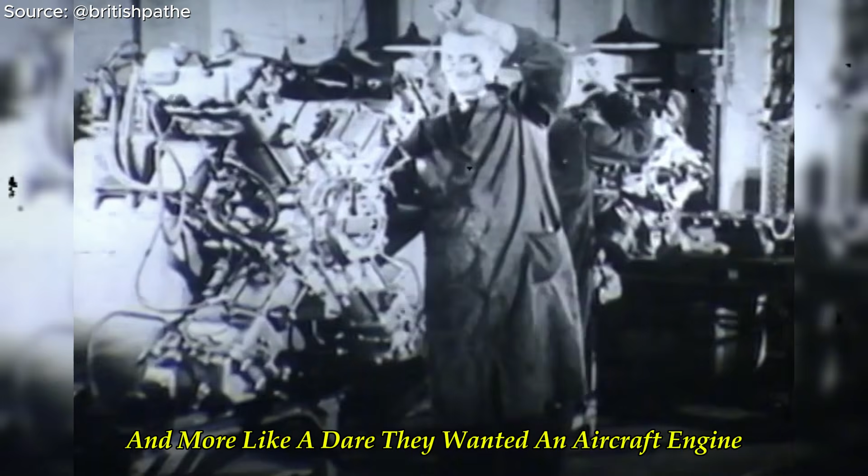In 1941, the United States Army Air Forces sat down and wrote a specification so extreme that it read less like an engineering request and more like a dare. They wanted an aircraft engine capable of producing between 4,000 and 5,000 horsepower. For context, the engine powering the workhorse Boeing B-17 Flying Fortress, the Wright R-1820 Cyclone, made about 1,200 horsepower on a good day. The Army wasn't asking for an improvement. It was asking for something more than triple the output of engines already considered massive.

And the reason wasn't ego. It was geography. Planners were terrified of a scenario in which the United Kingdom fell to Nazi Germany, leaving America without a forward base from which to strike Europe. If that happened, bombers would need to fly from North American soil, cross an ocean, deliver their payload, and return, all without refueling. That kind of range demanded a new class of engine, one built around fuel efficiency at a scale nobody had ever attempted.

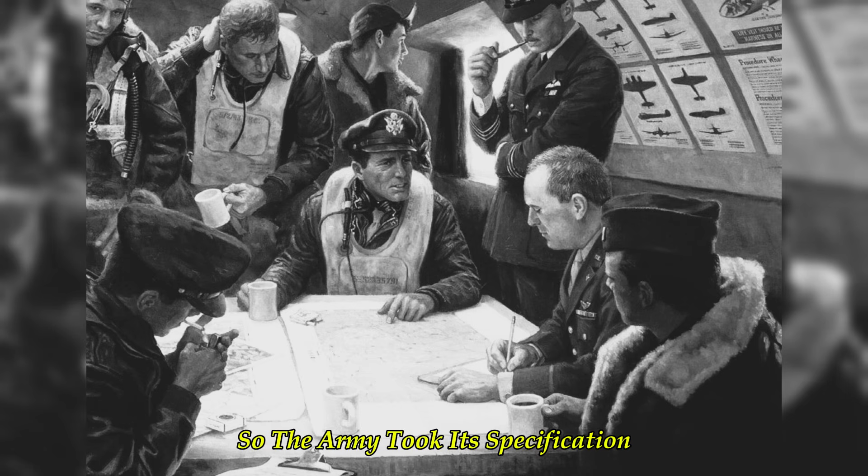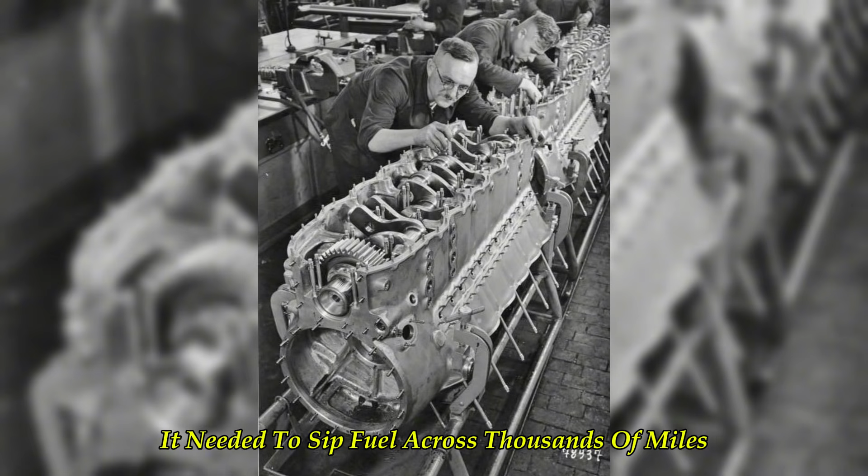So the Army took its specification and walked it around Detroit and beyond, knocking on the doors of the biggest names in American power plant engineering. One by one, the giants of American engine manufacturing looked at the numbers and walked away. The horsepower target was brutal enough on its own, but the fuel efficiency requirement made it worse, because building something that powerful usually meant building something that drank fuel at a catastrophic rate, and this engine needed to do the opposite. It needed to sip fuel across thousands of miles while producing more raw power than almost anything in the sky. Every company with the resources to attempt it took one look and decided the risk wasn't worth the reward.

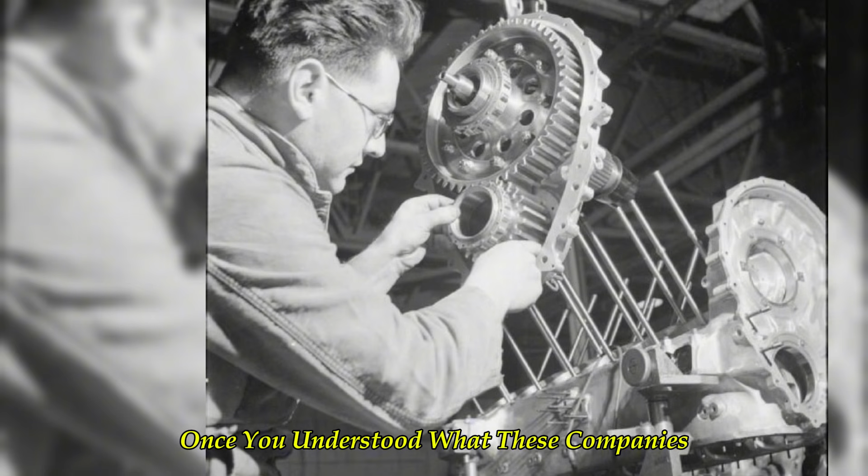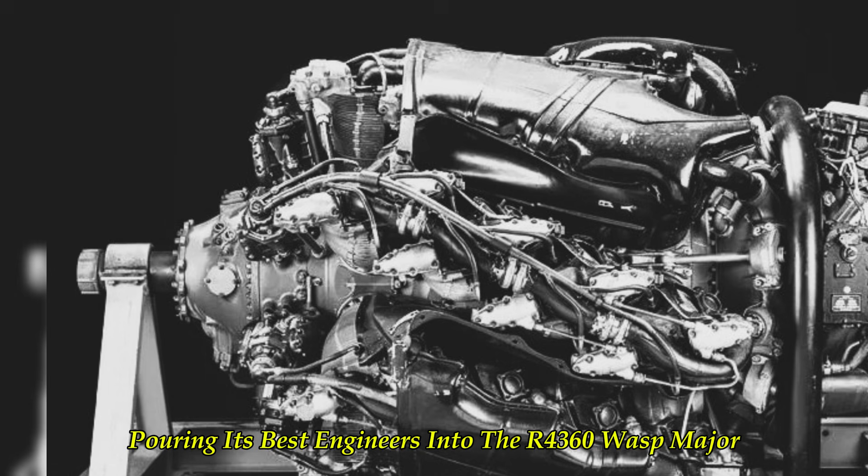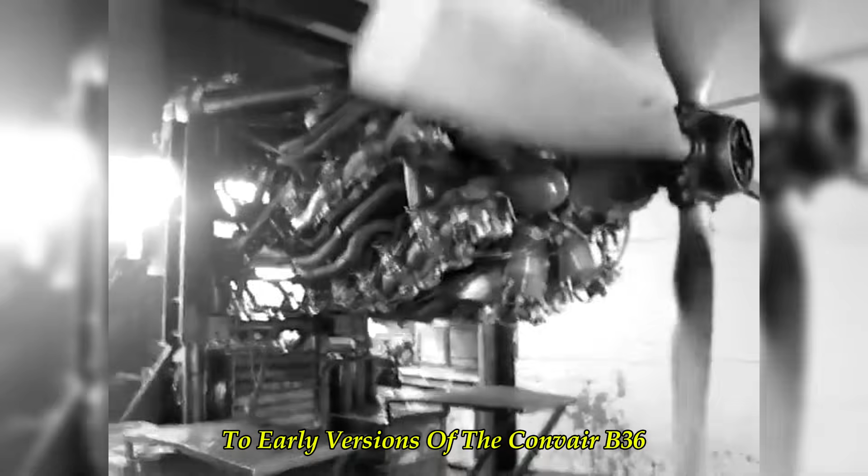The hesitation made sense once you understood what these companies were already juggling. Wright Aeronautical was buried under demand for the R-3350 Duplex Cyclone that would eventually carry the Boeing B-29 Superfortress across the Pacific, and it had no spare engineering capacity to gamble on an unproven power plant with a horsepower target nobody had reached before. Pratt & Whitney was equally consumed, pouring its best engineers into the R-4360 Wasp Major, an air-cooled 28-cylinder radial nicknamed the Corn Cob for its distinctive four-row layout, an engine that would eventually power everything from the Boeing B-50 to early versions of the Convair B-36.

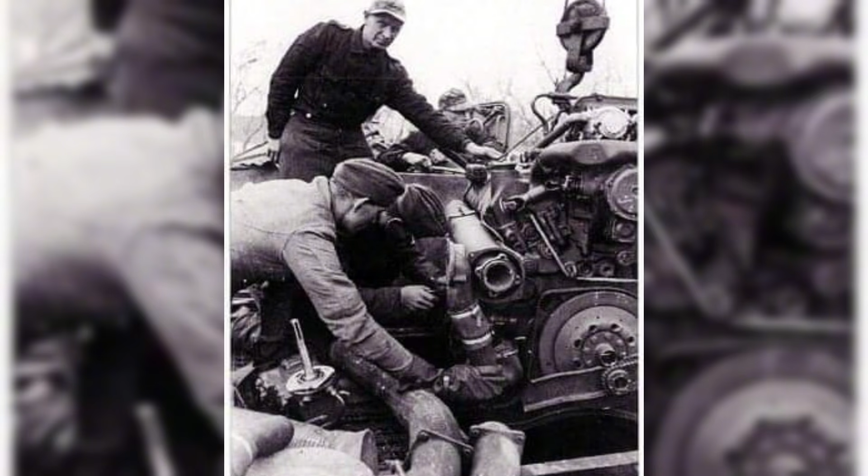Every serious engine manufacturer in the country was already stretched thin building proven designs at wartime volume, and volunteering to chase an unproven 5,000 horsepower target looked, to men running production lines under enormous pressure, like a distraction they simply could not afford. Curtiss-Wright, still fielding orders for its own radial engines across multiple aircraft programs, faced the identical calculation and reached the identical conclusion, leaving the Army with a shrinking list of qualified candidates and a widening sense of urgency as the calendar pushed further into the war.

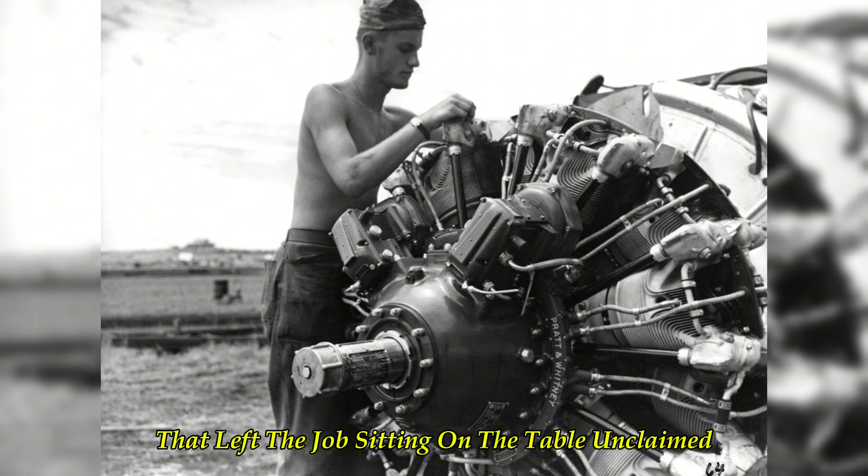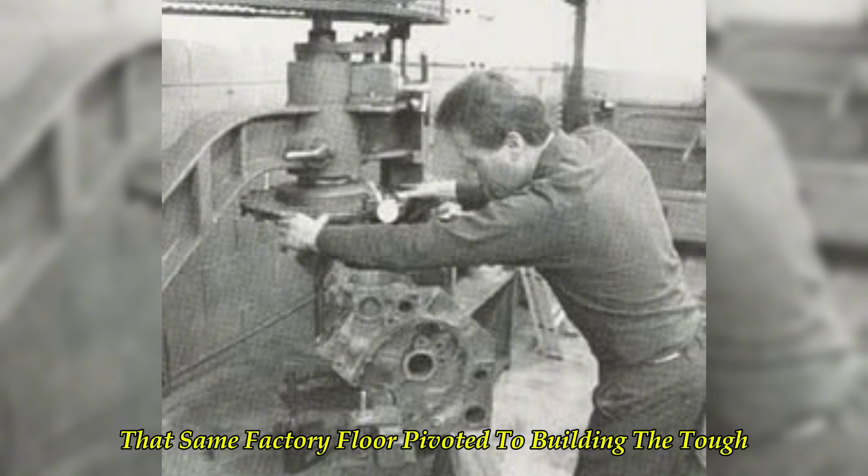That left the job sitting on the table, unclaimed, until it landed at the doorstep of a company nobody expected, Studebaker. Studebaker was not an aircraft engine manufacturer. It was a car company out of South Bend, Indiana, a firm that traced its roots back to a wagon and carriage business founded generations earlier, and that had spent the interwar years building well-regarded sedans. During the war, that same factory floor pivoted to building the tough little M29 Weasel tracked utility vehicle.

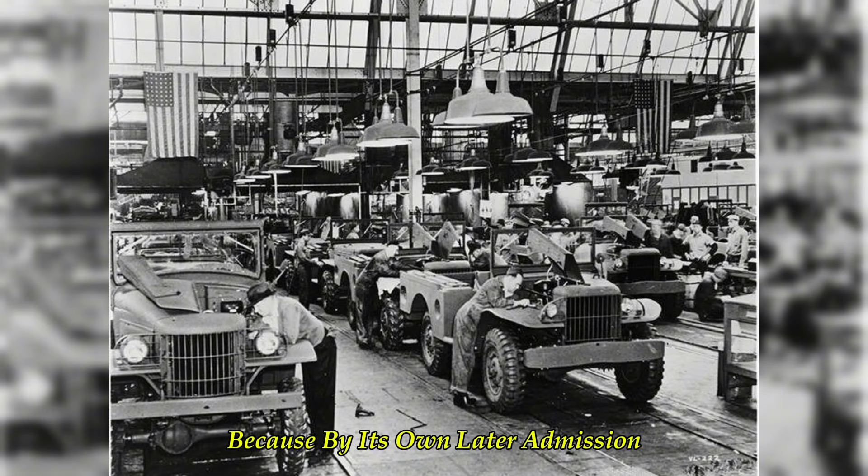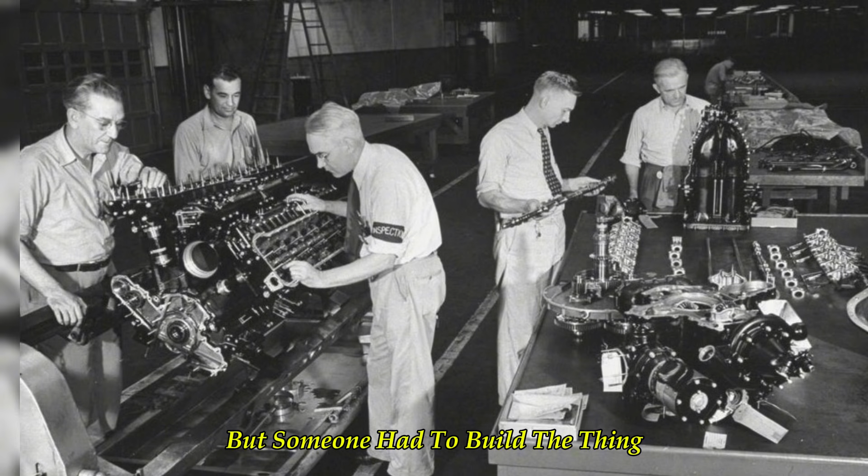Studebaker had space in its factories. It had engineering talent. And crucially, it had almost nothing to lose, because by its own later admission, the company had no real interest in becoming a permanent player in the aircraft engine business. This was a wartime obligation, not a strategic ambition. But someone had to build the thing, and Studebaker had the capacity, so the Army handed them the program, internally designated MX-232, and the clock started ticking.

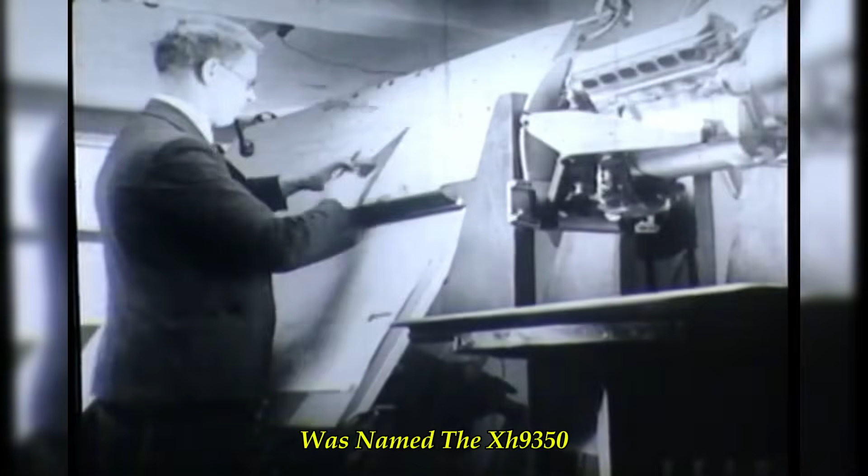To lead the design, Studebaker brought in a veteran propulsion engineer named Norman Tilley. Tilley wasn't a stranger to oversized, unconventional engines. The engine that emerged from Tilley's drawing board was named the XH-9350, a designation that wasn't just a random string of numbers. It described the engine's total displacement in cubic inches, 9,350 cubic inches, which converts to roughly 153 litres. To put that in perspective, a typical modern car engine displaces around 2 litres. The XH-9350 displaced enough volume to swallow more than 70 of them.

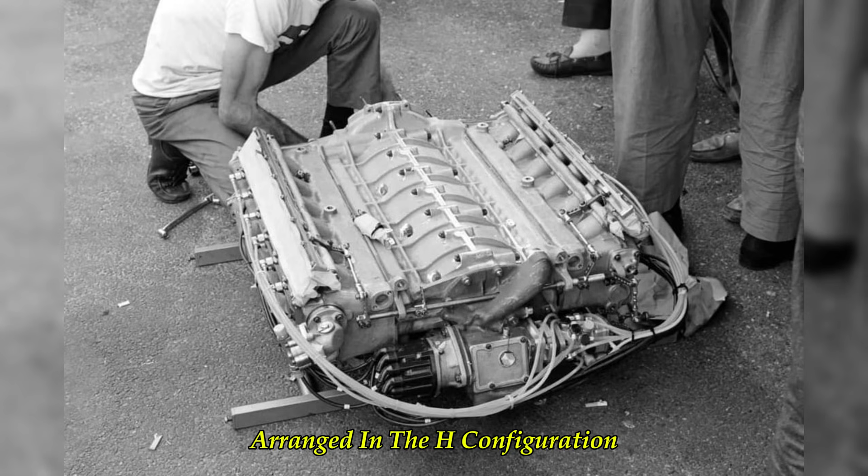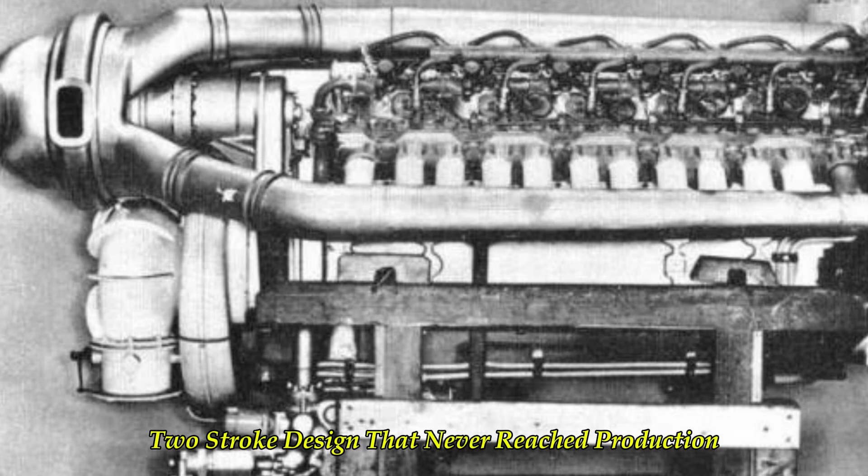It was liquid-cooled, arranged in the H configuration, meaning it was effectively two flat, horizontally opposed 12-cylinder engines stacked one on top of the other and geared together to drive a common output shaft. This layout wasn't unique to Studebaker. The British had already gone down this road with the Napier Sabre, the H-24 engine that powered the Hawker Typhoon and later the Hawker Tempest, ground attack aircraft that terrorized German armor columns in the months following the Normandy invasion. Rolls-Royce had experimented with a similarly radical concept in the Crecy, a sleeve valve two-stroke design that never reached production. But Studebaker was pushing the concept further than any of them, into genuinely uncharted displacement territory.

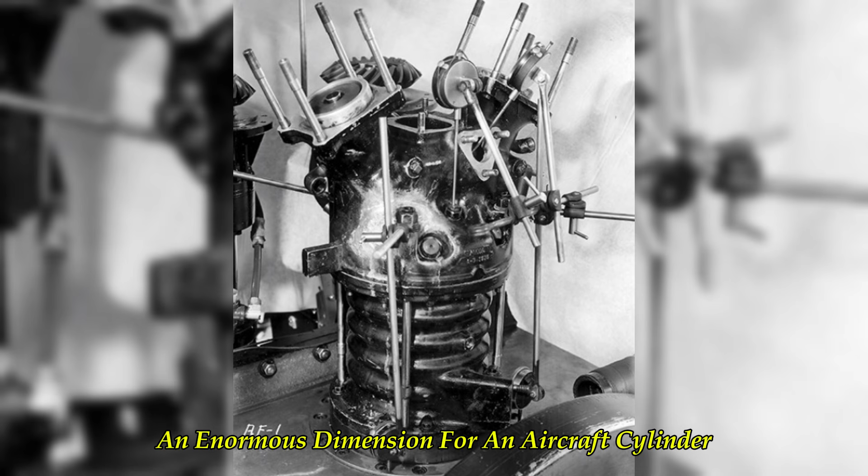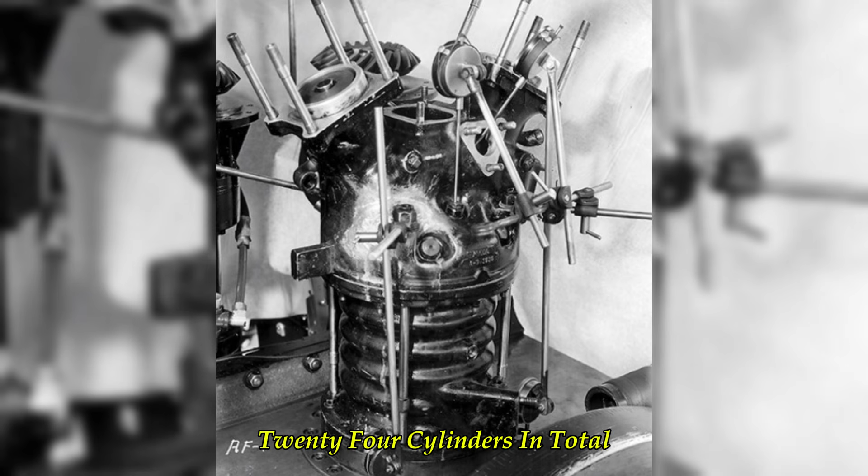The physical numbers were staggering. Each cylinder carried an 8-inch bore, an enormous dimension for an aircraft cylinder, paired with a bore and stroke ratio that Tilley's team had calculated down to the decimal to balance power output against mechanical stress. 24 cylinders in total, arranged across the two banks, a projected output of 5,000 horsepower, sitting right at the top edge of what the Army had originally demanded.

And despite that almost unbelievable power figure, the complete engine was projected to weigh close to 7,000 pounds, a number that engineers were fighting to keep as low as possible, because every pound of engine was a pound that couldn't be fuel, and fuel was the entire point of this program.

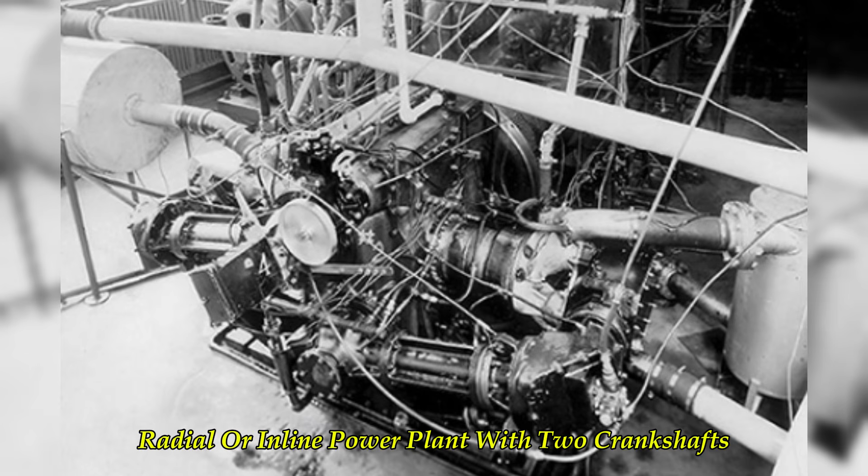Building an H-block engine of this size introduced problems that simply didn't exist on a conventional radial or inline power plant. With two crankshafts running in parallel, one for the upper bank of 12 cylinders and one for the lower bank, the engine needed a gear train precise enough to keep both crankshafts perfectly synchronized under load, because even a tiny mismatch could translate into destructive torsional vibration capable of tearing the engine apart from the inside.

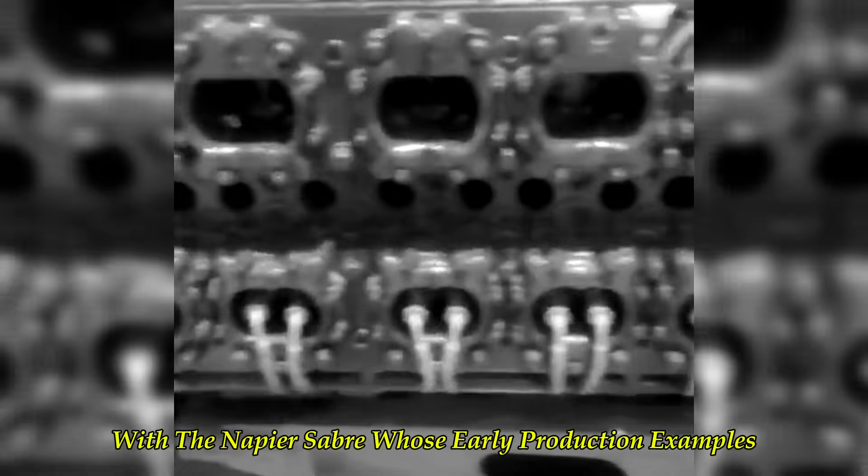The British had learned this lesson the hard way with the Napier Sabre, whose early production examples were plagued by sleeve valve failures and cooling problems so severe that entire squadrons of Hawker Typhoons were grounded, while engineers scrambled for fixes, problems that Napier didn't fully resolve until well into 1944.

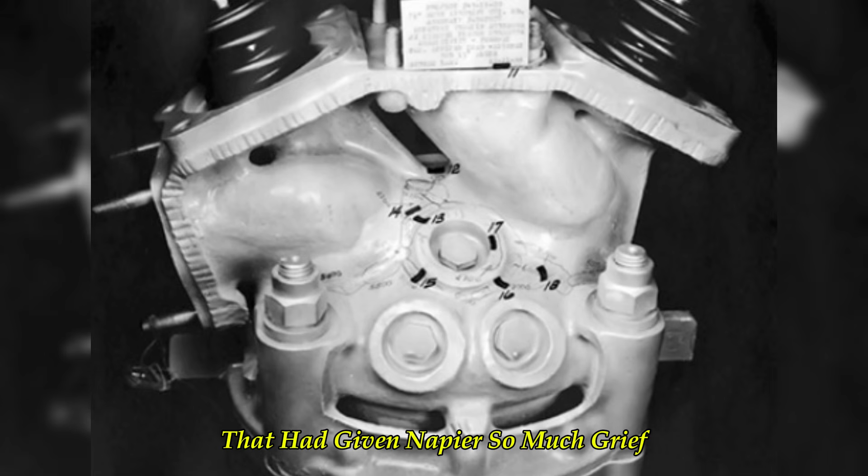Tilley's team studied those failures closely, choosing conventional poppet valves over the more exotic sleeve valve arrangement that had given Napier so much grief, a decision that traded away some theoretical efficiency for a design the Studebaker engineers believed they could actually make reliable within the timeline they had been given.

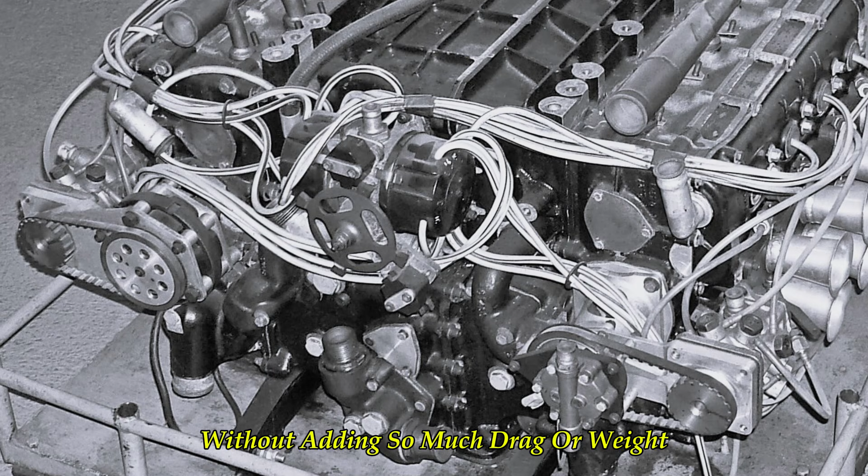Cooling was its own nightmare at this scale, since a liquid-cooled engine producing 5,000 horsepower generates an enormous amount of waste heat that has to be carried away through radiators without adding so much drag or weight that it defeats the entire purpose of the aircraft it was meant to power.

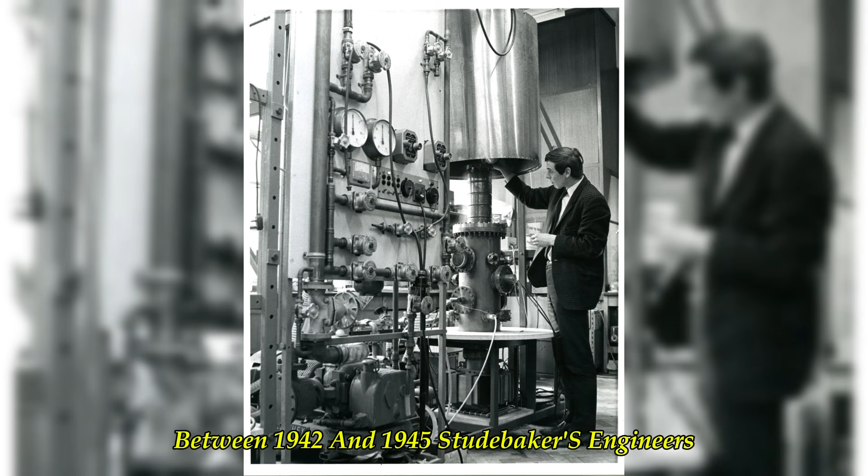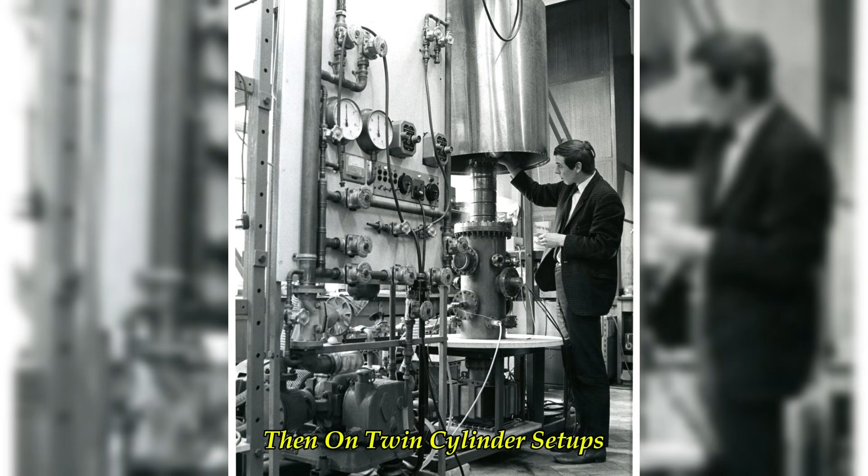This wasn't a paper exercise dreamed up in a design office and left to gather dust. Between 1942 and 1945, Studebaker's engineers logged thousands of hours of dynamometer testing, first on single-cylinder test rigs to validate the fundamental combustion characteristics, then on twin-cylinder setups to study how adjacent cylinders in the H-block would interact under load. Real metal was cut, real components were machined, tested, refined, and tested again.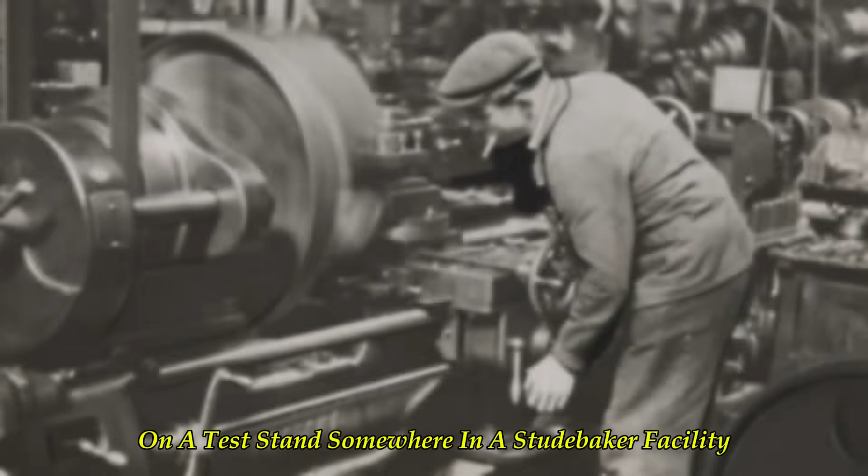A full prototype engine had been ordered and was moving through fabrication. This was as close to a finished product as an experimental aircraft engine of this scale could get, without actually running as a complete unit on a test stand. Somewhere in a Studebaker facility, technicians in coveralls were adjusting valve timing and recording data on an engine that, had it reached production, would have been the most powerful liquid-cooled piston aircraft engine the United States had ever built.

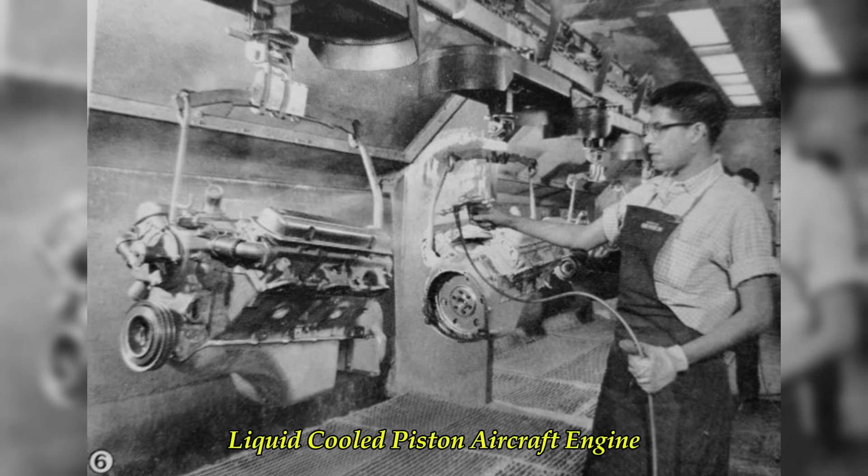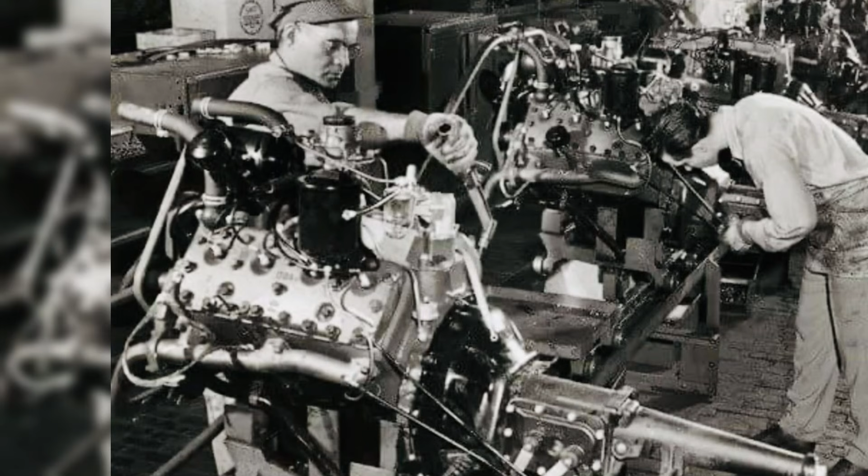The single-cylinder test work alone tells you how methodical this program was. Rather than gambling everything on a complete assembled engine straight out of the gate, a hugely expensive and risky approach given how many unknowns existed in a design this large, Tilly's team built individual test cylinders that mimicked the exact bore, stroke, and cooling passages of the final design, then ran them on dynamometers to measure combustion behavior, detonation limits, and thermal loading in isolation.

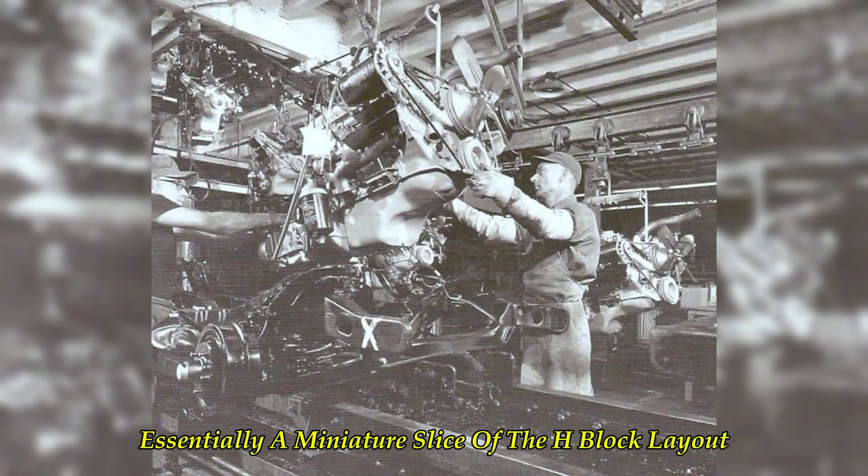Only once those single-cylinder results looked promising did the team move to twin-cylinder rigs, essentially a miniature slice of the H-block layout, to study how neighboring cylinders influenced each other's cooling and vibration characteristics.

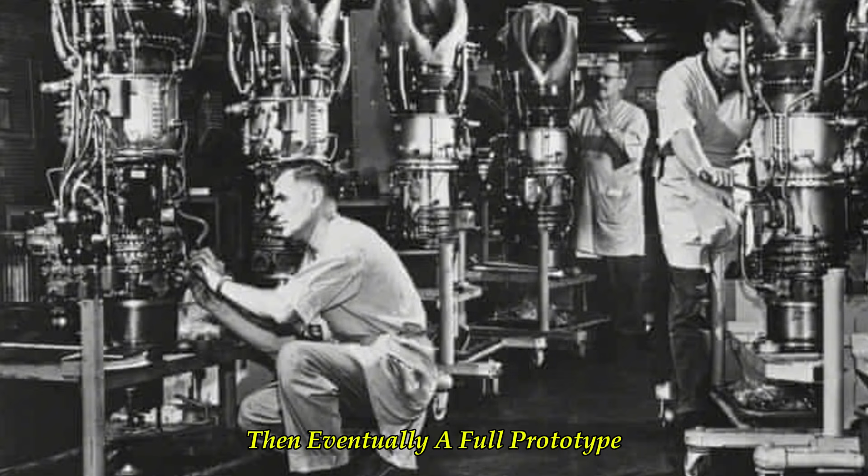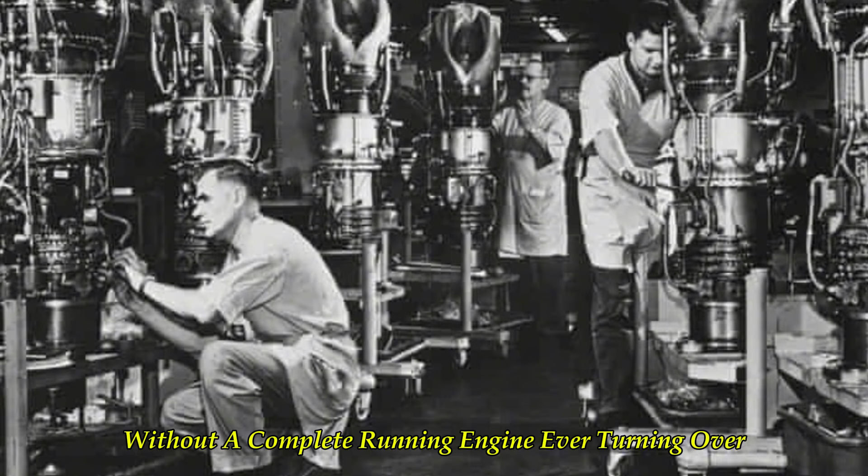This staged approach, single-cylinder first, then twin-cylinder, then eventually a full prototype, was standard practice for genuinely novel engine architectures, and it explains why 3 full years passed between the project's start and its cancellation without a complete running engine ever turning over. Every stage generated data that fed back into revisions of the design, and every revision meant new parts had to be machined and tested again.

It was slow, expensive, methodical work. The kind that rarely produces dramatic headlines but that separates a serious engineering program from a fantasy sketched on a napkin.

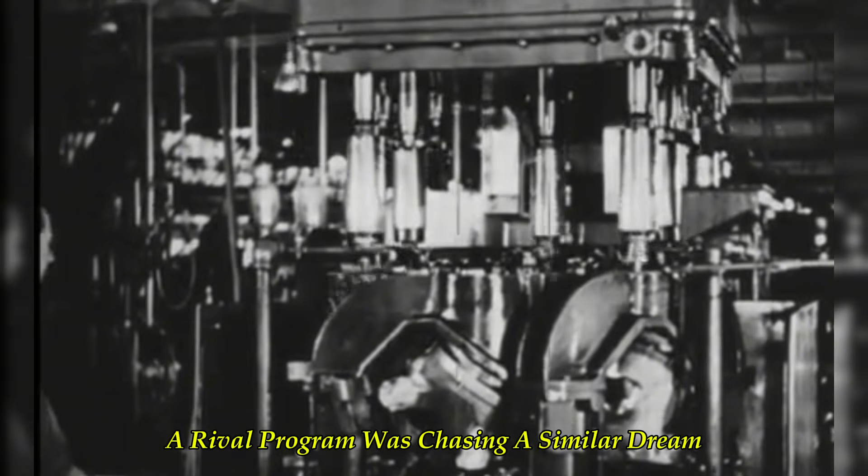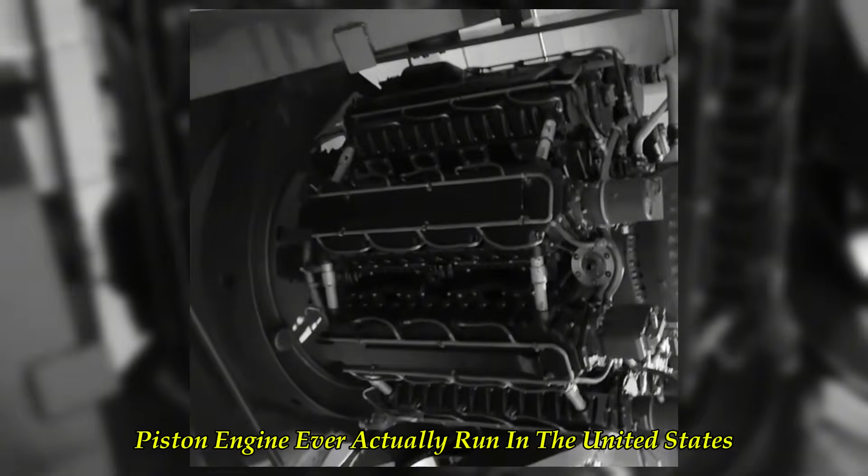Meanwhile, elsewhere in the country, a rival program was chasing a similar dream from a different direction. Lycoming was developing the XR-7755, an almost science fiction-looking radial engine with 36 cylinders arranged in 9 banks of 4, displacing an even larger 7,755 cubic inches. The Lycoming design would eventually claim the title of the largest displacement aircraft piston engine ever actually run in the United States, reaching 5,000 horsepower on the test stand in 1944 before reliability problems and the fast-approaching arrival of jet propulsion ended its story too.

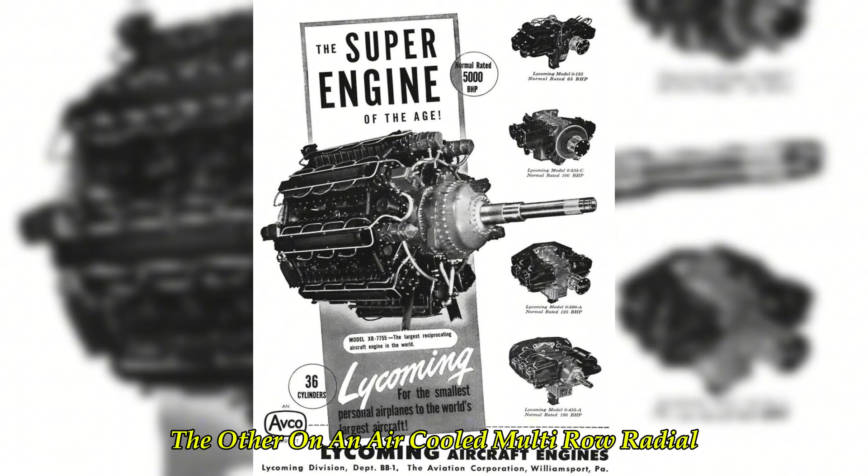Studebaker and Lycoming were essentially racing toward the same finish line from opposite directions, one betting on H-block liquid cooling, the other on an air-cooled multi-row radial, and both racing against a war that was ending faster than anyone in Detroit or South Bend had planned for.

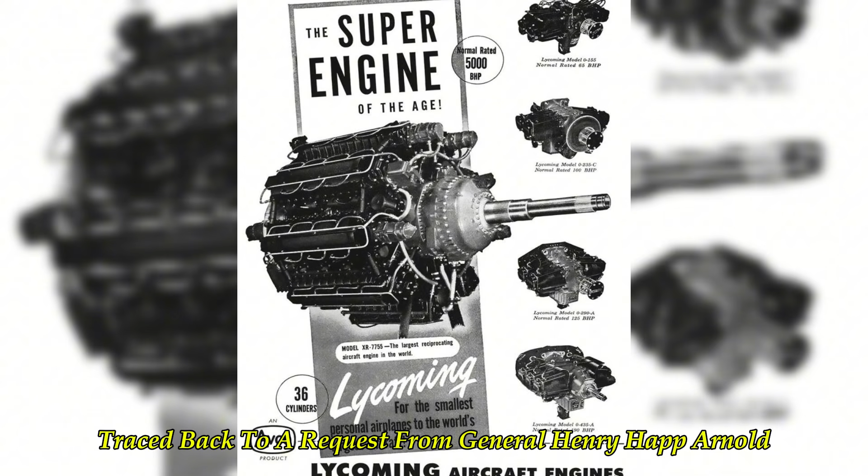The whole intercontinental bomber concept that justified an engine this extreme traced back to a request from General Henry Hap Arnold in the spring of 1941, made at a moment when German forces controlled most of continental Europe, and a British collapse seemed like a real possibility to American war planners.

Arnold wanted an aircraft that could take off from Maine, strike targets in Germany, and return home without landing on foreign soil, a requirement so far beyond existing aircraft technology that it forced the entire industry to rethink what a bomber, and the engines powering it, could actually be.

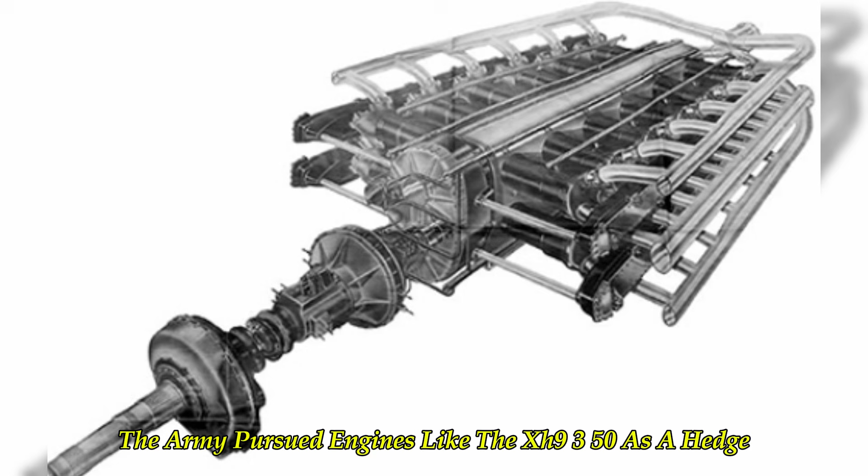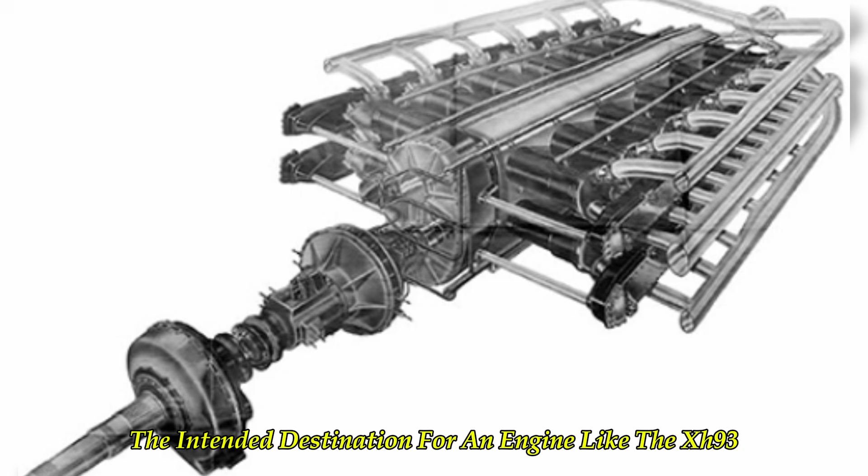Convair answered that call with the earliest design studies for what would become the B-36, while separately, the Army pursued engines like the XH-9350 as a hedge, a way of making sure that whichever airframe eventually won the competition would have a power plant capable of matching its ambitions. The intended destination for an engine like the XH-9350 was never entirely settled, because the entire point of the program was flexibility for a future that hadn't fully taken shape yet.

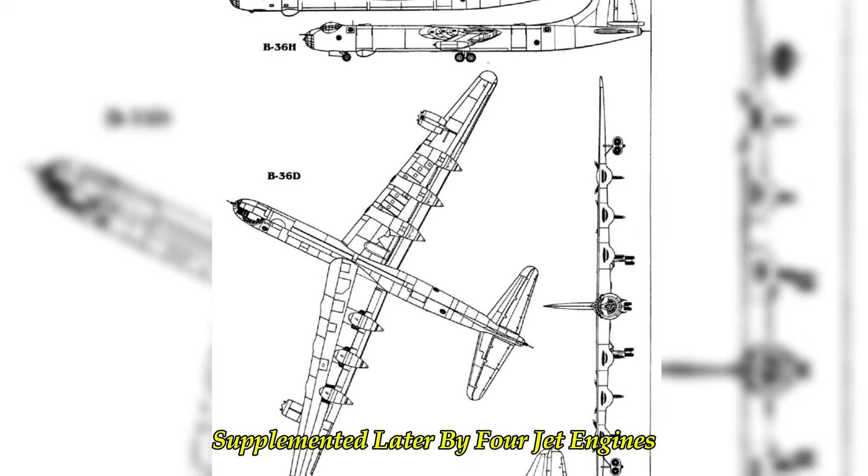Convair was already sketching the earliest concepts of what would eventually become the B-36 Peacemaker, a bomber so large it would ultimately fly on 6 Pratt & Whitney R-4360 Wasp Major radial engines, supplemented later by 4 jet engines bolted under the wings.

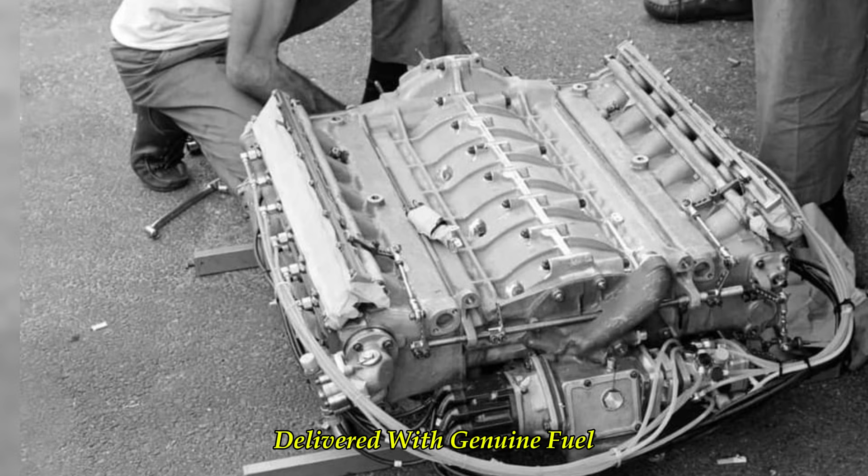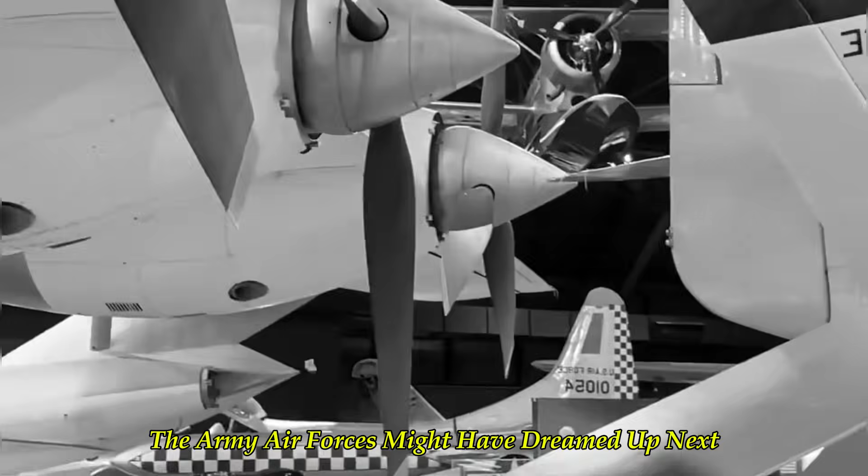The B-36's designers, much like Studebaker's engineers, were obsessed with one brutal fact of physics, that intercontinental range meant carrying an enormous weight of fuel, and every ounce of that fuel had to be paid for somewhere else on the airframe. An engine like the XH-9350, with its promise of 5,000 horsepower delivered with genuine fuel economy, was exactly the kind of power plant that a hemisphere-spanning bomber fleet would have wanted in its inventory, whether mounted on a B-36-style behemoth or on whatever successor aircraft the Army Air Forces might have dreamed up next.

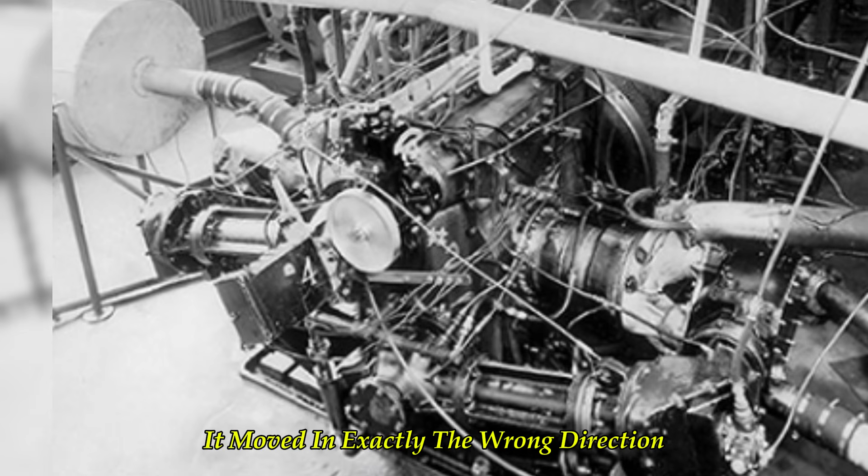But history has a habit of moving faster than engineering programs, and in the case of the XH-9350, it moved in exactly the wrong direction. The war in Europe ended in May of 1945. The war in the Pacific ended that August. And almost overnight, the entire strategic justification for a fuel-sipping 5,000 horsepower engine designed to fly bombers from Kansas to Berlin without landing simply evaporated.

There was no more need to plan for a fallen Britain, because Britain hadn't fallen. There was no more need to plan around a Pacific War stretching into 1947 or beyond, because Japan had surrendered. The Army's original order for 6 complete prototype engines was slashed down to a single unit, a devastating signal to any engineering team that the program's priority had collapsed.

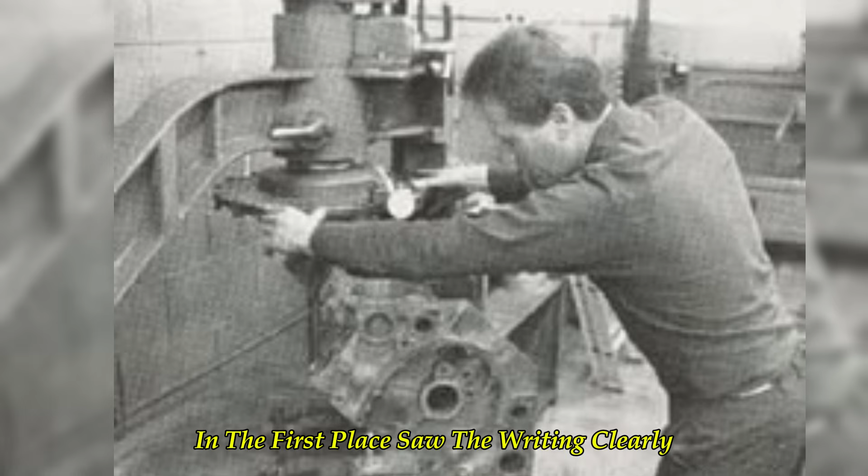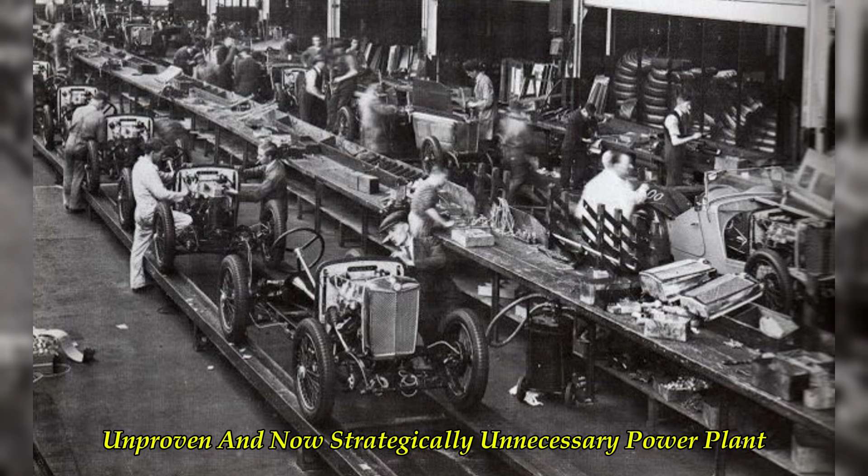And Studebaker, which had never wanted to be a permanent aircraft engine manufacturer in the first place, saw the writing clearly. The company wanted to get back to building cars for a peacetime American public that was hungry for new automobiles after years of wartime rationing, not continue pouring resources into a niche, unproven, and now strategically unnecessary power plant. In October of 1945, the XH-9350 program was formally cancelled.

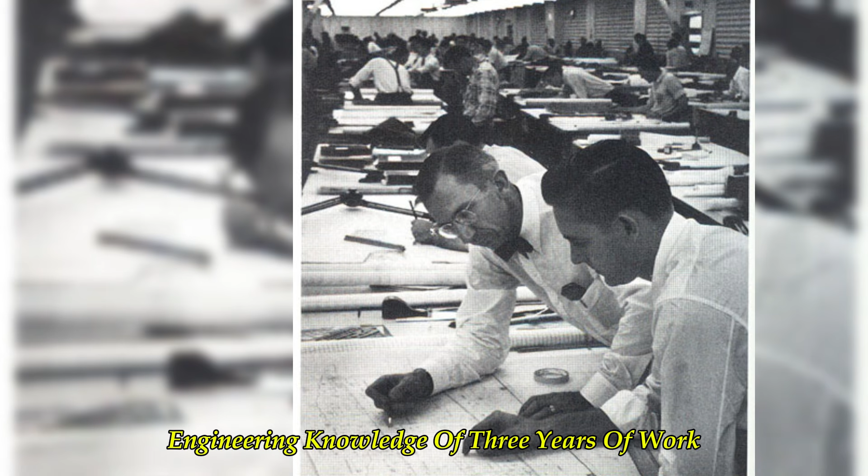The drawings, the calculations, the accumulated engineering knowledge of 3 years of work were shipped off to Wright Field in Ohio, the Army Air Force's primary research and testing installation, where so many other cancelled wartime projects went to be quietly archived and largely forgotten. The physical hardware, the machined cylinder blocks, the test components, the nearly complete prototype that Tilly's team had been assembling, is generally believed to have been scrapped.

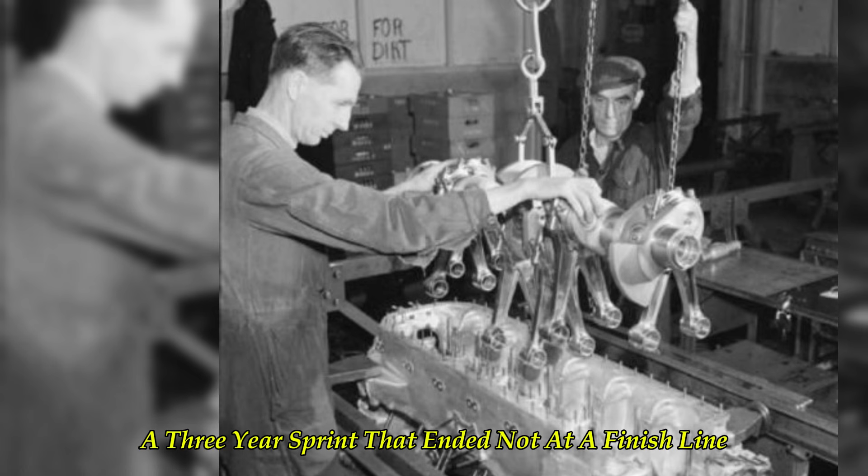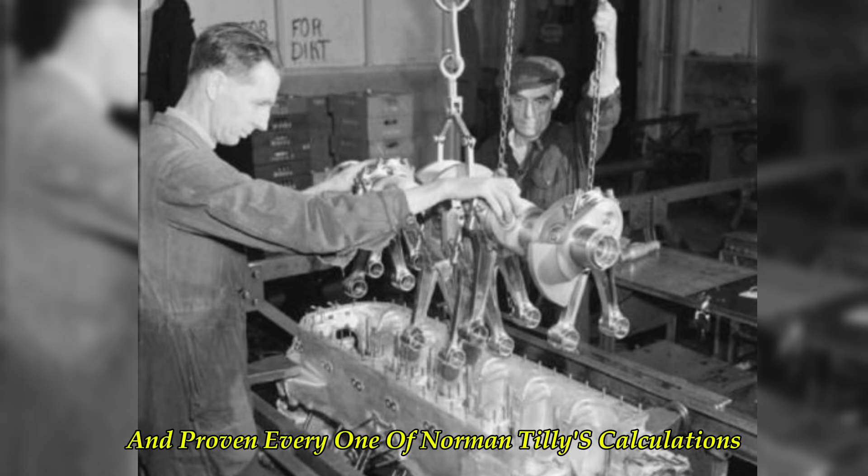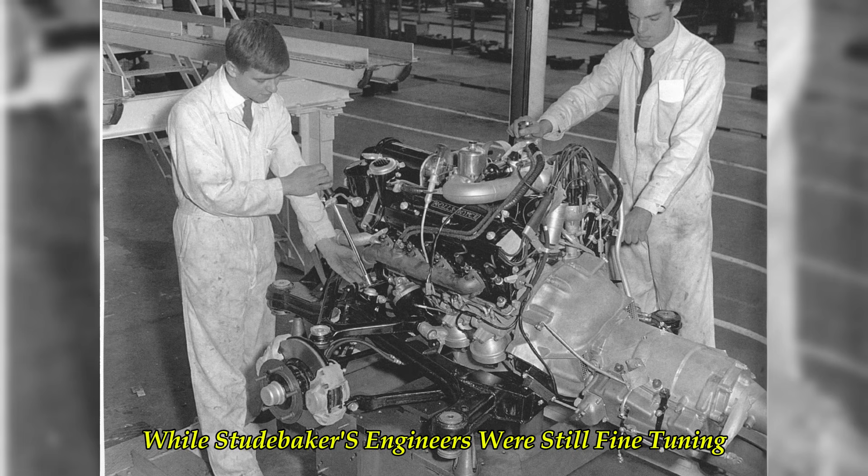There was no dramatic unveiling, no test flight, no moment where the engine roared to life in front of assembled generals. It simply stopped, mid-stride, a 3-year sprint that ended not at a finish line, but at a wall nobody had seen coming. And even if the war had dragged on another year, even if Studebaker had finished that prototype and proven every one of Norman Tilly's calculations correct, the XH-9350 was already facing a second executioner waiting in the wings. Jet propulsion.

While Studebaker's engineers were still fine-tuning valve clearances on their H-block giant, General Electric was rapidly advancing turbojet technology that would soon produce the J-47, an engine that would power the North American F-86 Sabre into combat over Korea and become one of the most mass-produced jet engines in history. Lockheed's P-80 Shooting Star, America's first operational jet fighter, was already flying by the war's final months.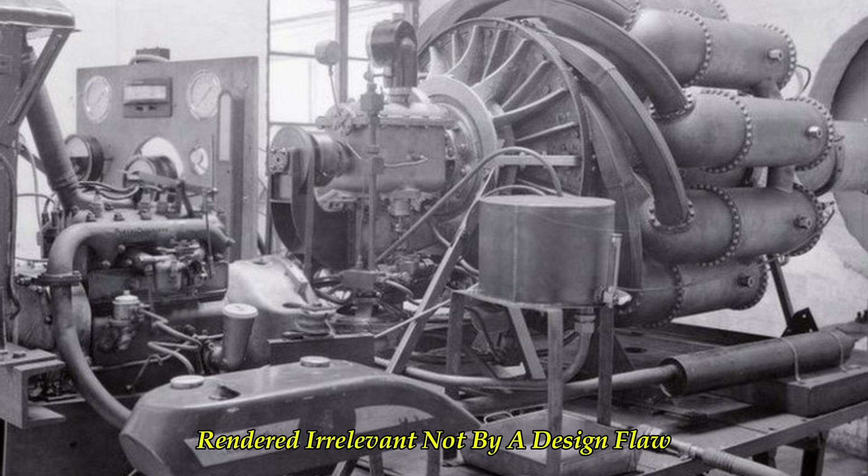The entire premise that had justified engines like the XH-9350 and the Lycoming XR-7755 and even the earlier Napier and Pratt & Whitney H-block experiments was the assumption that piston power would remain the only viable path to high-output flight for years to come. Jet engines shattered that assumption within an astonishingly short window. A finished, flying XH-9350 in 1946 would likely have been obsolete within 2 or 3 years anyway, rendered irrelevant, not by a design flaw, but by an entirely different branch of the technology tree suddenly bearing fruit.

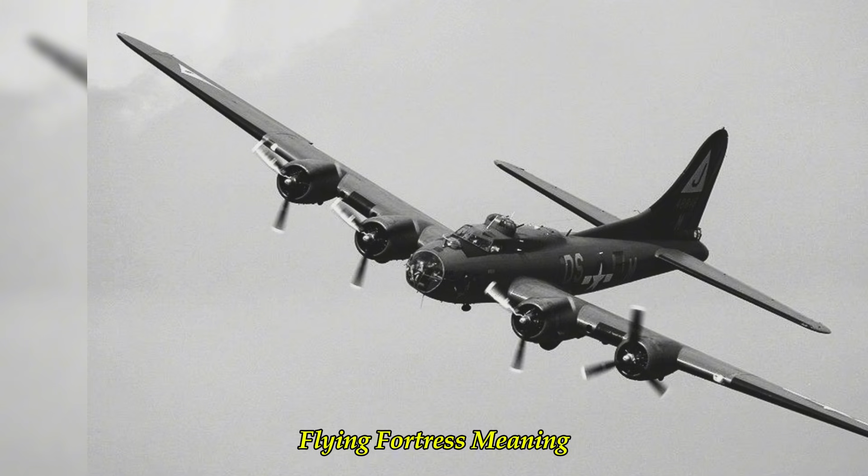There is a strange twist buried in this story that makes it feel less like a dead end and more like a full circle. Studebaker didn't simply walk away from aviation power plants forever. During the war, the same company had been busy building Wright R-1820 Cyclone engines under license, the very engine family that powered the B-17 Flying Fortress, meaning Studebaker's factories had already been turning out reliable radial engines for Boeing's iconic bomber, even while Norman Tilley's team worked on the far more ambitious H-block design down the hall.

What makes the XH-9350 worth remembering isn't that it failed. Plenty of wartime engineering programs failed, and most of them are barely footnotes today. What makes it remarkable is how close it came to succeeding, and how much genuine engineering discipline went into a project that history had already quietly scheduled for cancellation before it even reached its final testing phase. This wasn't a fantasy sketch or an unbuilt paper concept like so many other wartime what-ifs.

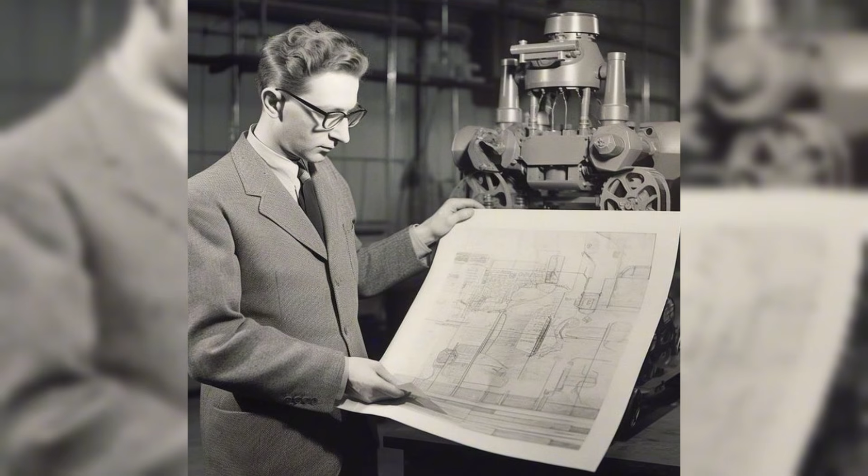Thousands of hours of dynamometer data existed. A prototype was under construction. Norman Tilley's team had solved real problems in cylinder cooling, crankshaft synchronization, and fuel delivery at a scale that few engineers anywhere in the world had ever attempted. They were, by every meaningful measure, on track to deliver a functioning 5,000 horsepower liquid-cooled aircraft engine, a machine that would have stood alongside the Napier Sabre and the Lycoming XR-7755 as one of the largest and most powerful piston aircraft engines ever built.

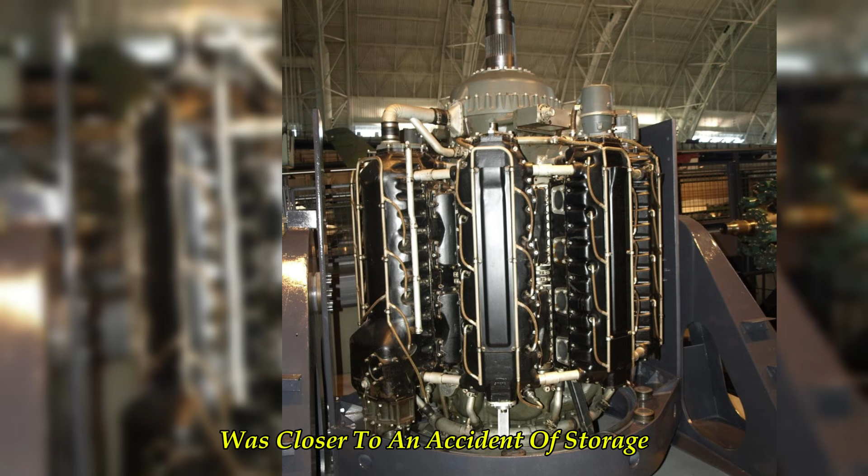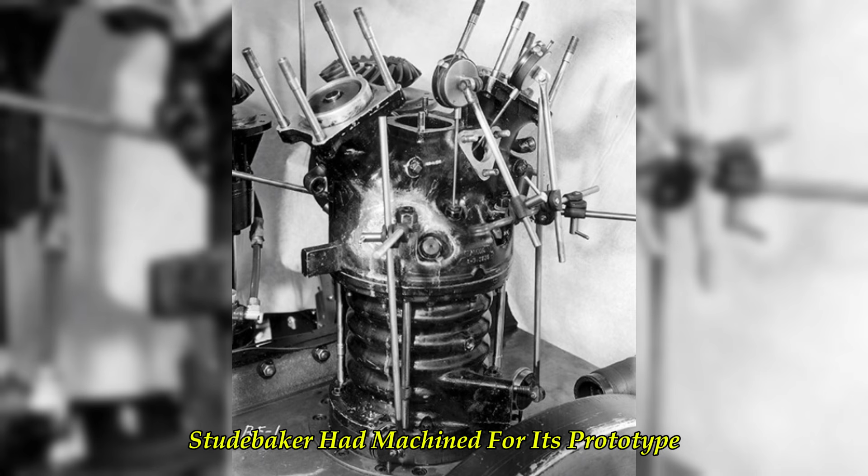Instead, the XH-9350 exists today almost entirely in archival paperwork. The XR-7755's survival was closer to an accident of storage than a deliberate act of preservation, and it took decades before restorers brought it back to a display-worthy condition. The XH-9350 was not so fortunate. Whatever hardware Studebaker had machined for its prototype never received that second chance.

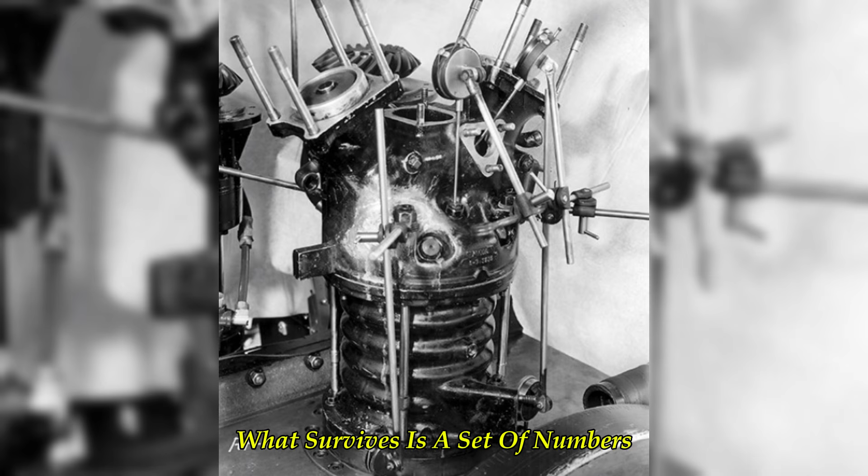There is no flight test footage, no roaring dynamometer video preserved for aviation enthusiasts to watch online. What survives is a set of numbers: an 8-inch bore, 24 cylinders, 9,350 cubic inches, 5,000 horsepower on paper, 7,000 pounds of engineering ambition that never got the chance to turn a propeller in anger.

It's worth sitting with the strange position Studebaker found itself in. A company built on manufacturing affordable cars for American families ended up as the last serious contender standing when the United States military needed the single most powerful aircraft engine ever attempted on American soil. Not because Studebaker was the most qualified or the most eager, but because every company that was supposed to be more qualified had already said no.

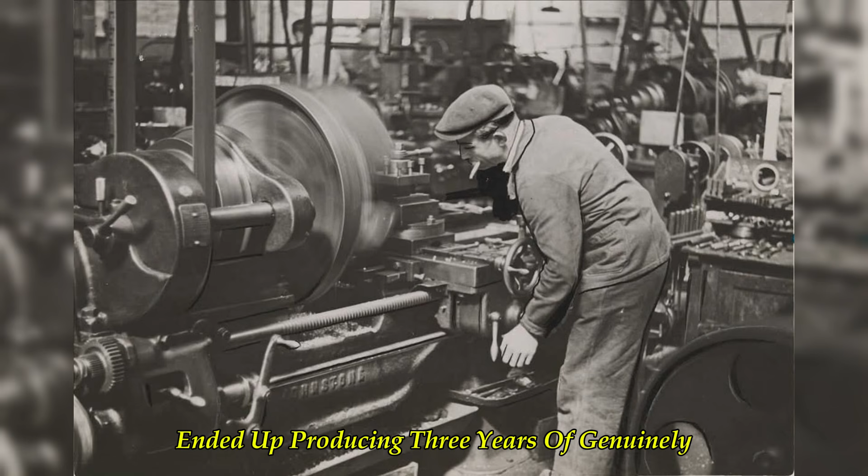Studebaker, a company that openly admitted it didn't even want the assignment, ended up producing 3 years of genuinely serious engineering work, hitting real technical milestones, and coming within a hair's breadth of fielding a working prototype, only to have the entire justification for the engine's existence vanish the moment the shooting stopped.

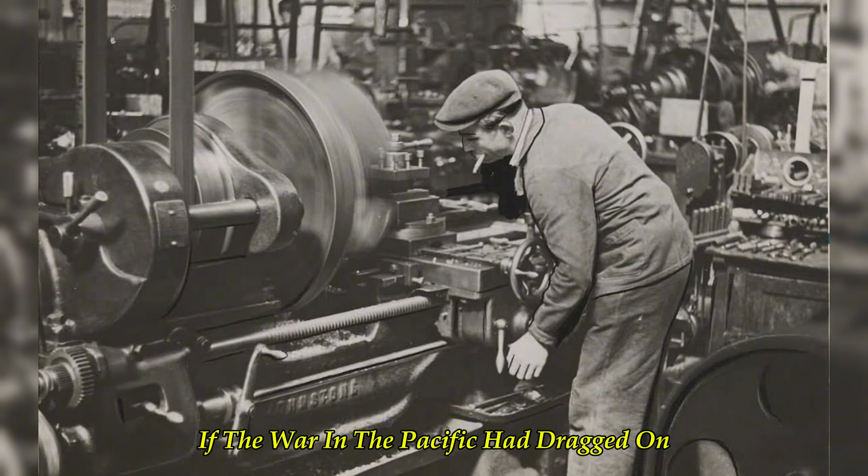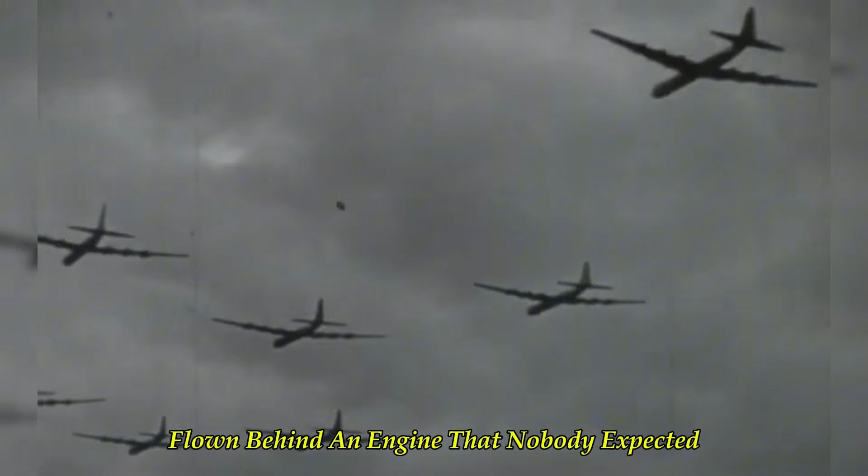If the war in the Pacific had dragged on even one more year, if Japan's surrender had come in 1946 instead of 1945, there is a real possibility that American long-range bombers might have eventually flown behind an engine that nobody expected a car company from Indiana to build. Instead, the drawings went into storage, the hardware went to the scrap heap, and the story of the biggest aircraft engine America almost built quietly closed its final chapter in October of 1945, just as the age of the jet engine was beginning to open its first.

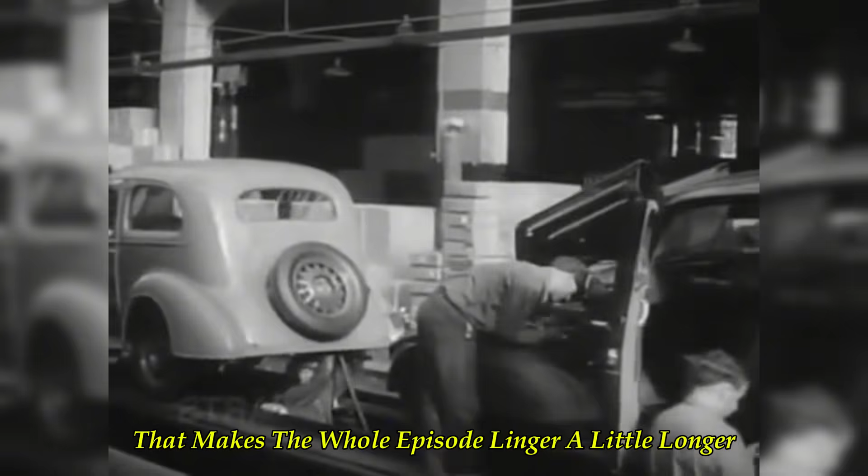There is one more detail that makes the whole episode linger a little longer than most cancelled wartime programs. Studebaker itself didn't survive as an independent automaker for very long after the aircraft engine chapter closed. The company merged with Packard, the very manufacturer that had once turned down the same engine assignment Studebaker had been forced to accept, in 1954, and the combined companies struggled through the following decade before Studebaker built its last automobile in 1966.

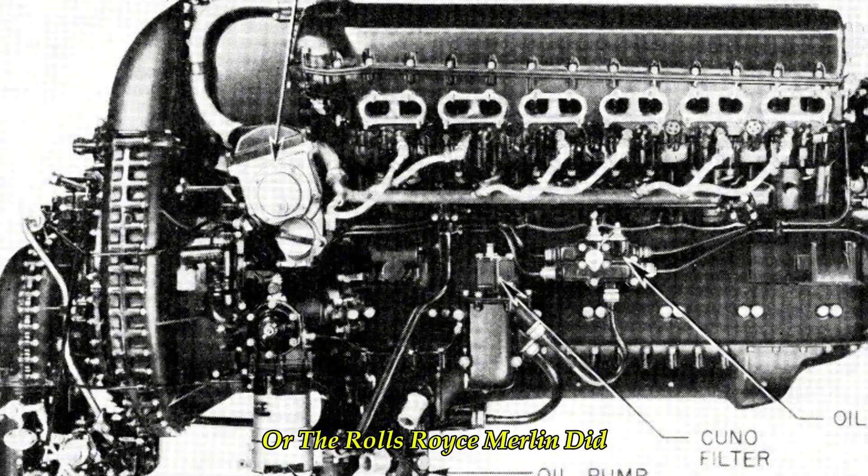Norman Tilley's name never became a household word the way Kelly Johnson's did at Lockheed or Alexander Kartveli's did at Republic, and the XH-9350 never earned a nickname the way the Napier Sabre or the Rolls-Royce Merlin did, despite representing years of serious, disciplined engineering by people who genuinely believed they were building something the world would eventually need.

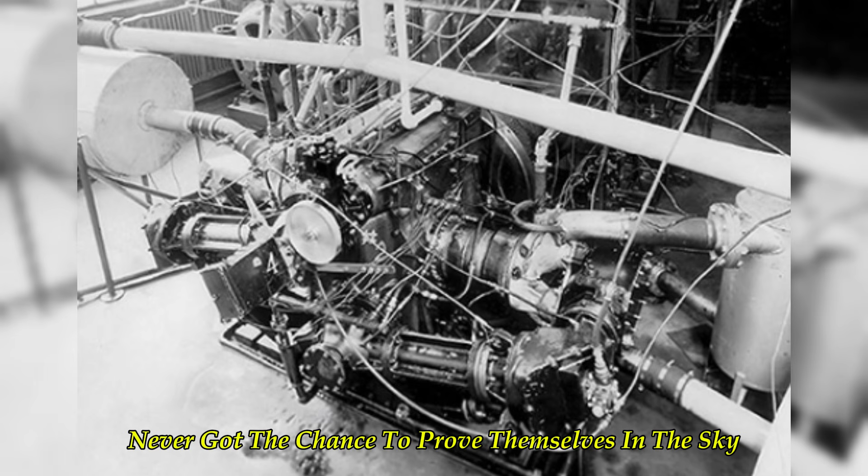It simply exists as a set of blueprints and test logs, a reminder that some of the most demanding engineering achievements of the Second World War never got the chance to prove themselves in the sky, not because the engineering failed, but because the war that created the need for them ended before the machines built to answer that need were finished.